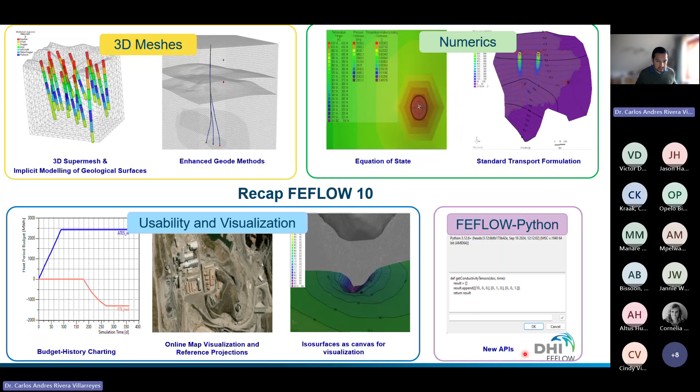And we obviously extend our Python interface with new APIs. So this was released in November 2024. Now we come to the version today, which is FEFLOW 11. FEFLOW 11 was released this January, late January 2026. And it's again a major software release. It has multiple significant changes in the software.

We keep working in our geological model, and this time we have a full implementation of the geological model. Obviously, there's still few things to be done, but it's very robust in this version 11. We have more workflows about meshes. We extend the way how we manipulate our wells through the well manager, how we group them.

Especially, we are also targeting a lot of different features for the geothermal market, and FEFLOW 11 is a version faster than ever. So we have introduced a significant performance boost on the way how we compute the different calculations, and I will elaborate this in the next slides. So if you want to get more details about all these features that I will explain today, everything is explained in our online help. There is always a what's new page where you can see all these different changes.

So let me start with the geomodeling part. So we introduce a new concept, what is called now in FEFLOW 11, a structural model editor. And this is the foundation and the base of all our different workflows today. And it will be the future tool for developing geomodeling workflows in FEFLOW in the next consecutive versions, in FEFLOW 12, 13, and so on.

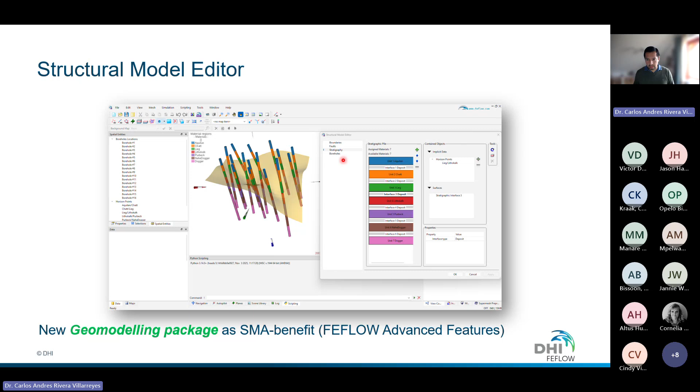A stratigraphic page where you define your stratigraphic pile, the definition of the different materials and the interface between the materials, and the raw information, the boreholes. So what do we support today?

And this implementation is actually, as we are speaking, extended, and we have a lot of developments now in the next months. So by the FEFLOW conference in September, we will reveal most of the expansion of this structural model editor. So as I mentioned before, the structural model editor is defined by these four different pages. But let's look what we can do in terms of geology.

So we have a stratigraphic pile. This pile can be built automatically if you import a number of boreholes where with some rules we detect certain logic of the boreholes. The logic depends on the material. So if you have some, let's say, common definition of materials in your different boreholes, we will identify this, build a pile. The pile consists of units. So I have here 7 units.

I have interfaces. We today support 3 types of interfaces: deposits, erosions, and baselaps. We will implement in the next months, actually it is done, but we didn't have time to incorporate it in the graphical interface. So the mathematical part or the background part is completed. We will have an interface that we call unconformal and conformal. For example, if you would like to simulate diapirs, that type of geometry will be available in the next months.

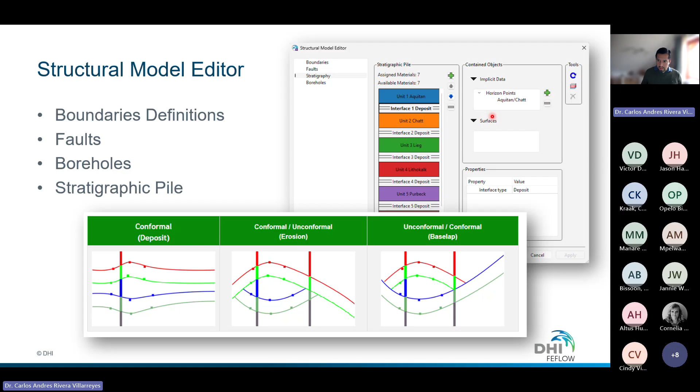Then, obviously, what is quite nice to have in this interface is that you can quickly play around with the type of interfaces. So what's going to happen if I change this interface three as an erosion? So this is a play model, so don't look too much into the details. It's just for demonstration. So I can change easily what the interface is. It's either a deposit or it's erosion, and then it will obviously influence the calculation of the geology.

So you might be wondering at this point, why do I really need to have a geological tool in FEFLOW? And the answer is very simple. Obviously you can do all these things and even more complex things, if we are honest, in different softwares. That's granted. What we guarantee with the FEFLOW built-in workflow is that the geometry that you build with our toolkit is a meshable geometry. So we will build geological interfaces and units which can be meshed later easily in FEFLOW.

That's the whole motivation. Because we have a lot of tools, for example, to import external geological data sets. You can import these data sets, but what we have been learning in the last 5 years is all these data sets come with a lot of data that is not ready to be meshed, because these third-party softwares are very good for the geology, but they have not been designed for numerical calculations in finite elements. So as soon as you start building your complex geometry based on an external data set, we will identify problems. We have tools to repair these problems, but obviously there is a limit to what our tools can repair or correct.

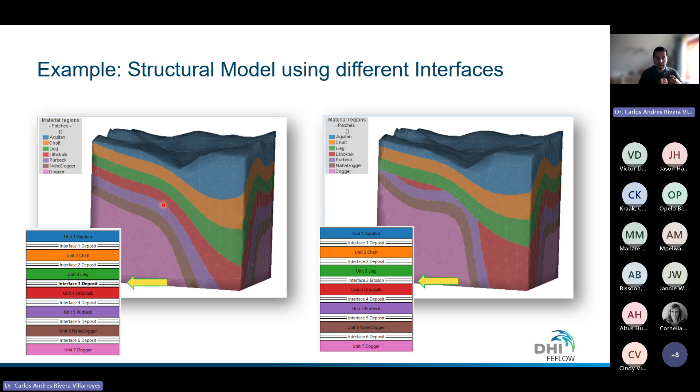Going more in the direction of meshing. So these tools that I was mentioning before are called geometric tools. They are used to correct different types of data. I will explain in a minute how we correct this. And then you have what we call a boundary representation. So it's a supermesh project that is ready to be meshed. You can use the standard mesh generators for the 3D supermesh. Standard means tetrahedral mesh generators.

We introduced a new option now called layer mesh generator. So you can build your layered mesh from the 3D world directly, which is very nice because sometimes you lose the flexibility if you go for a tetrahedral mesh. So here you will have a typical prismatic mesh in FEFLOW, and if you have pinch outs, we can preserve these pinch outs with layer continuity by setting a minimum thickness.

Then the layer configurator has now been modified strongly. This layer configurator has existed in FEFLOW for probably 20 years or more. So now we are introducing new concepts. We have revamped the whole design of the configurator so that it is simpler to build meshes.

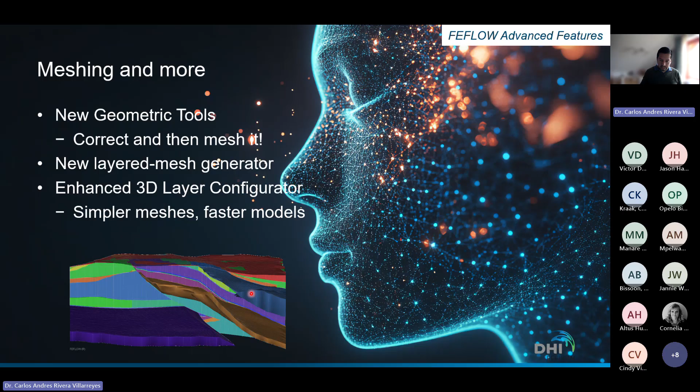So we want to help you simplify models, to create models that are complex, but at the same time the mesh discretization is simple enough, which also has the positive consequence of speeding up the calculation. Let's look at these different geometric tools and layer meshes.

So for the geometric tools, we have a toolbar. It's called Supermesh Preprocessing. In the panel, we have a toolbar called Geometric Tools, and these tools have different purposes. So let me explain. If you see here, I have a fault, which is very finely discretized, and there is a small layer or a box. This is not meshable. If you throw it to the mesh generator, it will give you an error message because this is not fitting.

So we have one tool to compute the geometrical intersection. It will basically intersect every single triangle that you see here with the triangles of the top face and the bottom of the box. We have the intersection computed, then we can remove what we don't need, so everything outside, and we can also retriangulate the surfaces so that the quality of the mesh is nicer. This is an optional step because when we build a tetrahedral mesh, we do this step anyway.

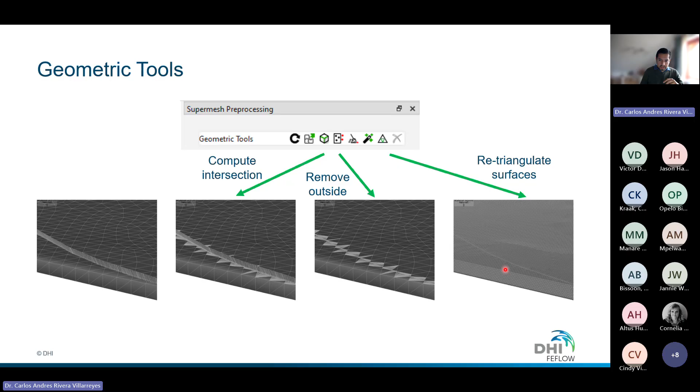So you can use these tools to correct different data sets. These data sets can come from shape files. If you work with shape files, they must be in 3D. CAD data sets, so DXF, DWG, Leapfrog files, so like LFM, and GoCAD files, TS, ML files.

So this layer is basically coinciding with the base of the domain and is disappearing. To continue the layer, we set this value, I would say here in this case 1 meter, and it will have continuity all the way. These configurations do not necessarily need to happen at the bottom or the top of the model. They can happen at any location of the model domain.

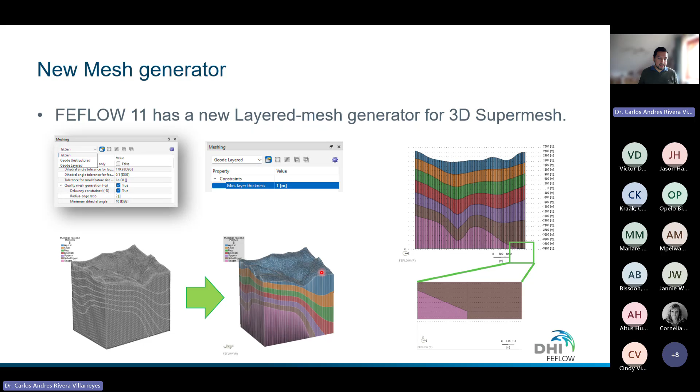So how do we do this? There is obviously an algorithm behind the scenes that needs to check whether we can build these meshes with this approach. We require a 3D super mesh project. We require a valid structural model, the model I was mentioning in the structural model editor, and it requires what we call a no multi-Z configuration.

What is a multi-Z configuration? If you have a vertical plane, obviously you cannot have a FEFLOW slice that goes all the way from the top to the bottom. So in this case, it's not possible to use the generator. What you will need to use is either the Geode Unstructured or the TetGen.

Okay, so you now have a mesh that is potentially made from prismatic elements, or you have an existing FEFLOW model. What can you do now? We have enhanced the way we present all these different workflows in the layer configurator, and now it's called differently. We have a slice layer configurator, and I'm going to explain why we introduced this new terminology. So we now have three alternatives for how to resolve these geological pinch outs.

The existing and very classical approach is what we call the minimum slice separation. Slice separation, because if you have a pinch out of the layer, a layer is defined by two consecutive slices. So we set the height of the slice, and this minimum height basically avoids the pinch out of the layer.

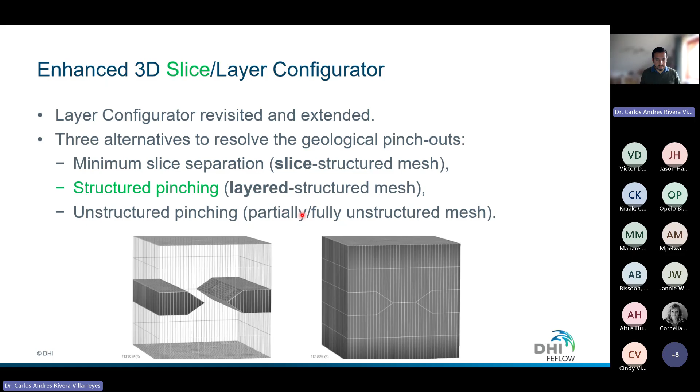And then we have the unstructured pinching, which basically means we will build a tetrahedral mesh if we have cases of intersection or collision between the different slices or surfaces. So this new concept of structured pinching is quite practical, because even though your layer does not extend over the whole horizontal domain, it will be treated as a layer in FEFLOW.

So you can go through the spatial entities. You can look at the layer that you want. In this case, I'm looking at layer 25. There is this one. I will have access to the slice view, so I can look at the top and the bottom of layer 25, even if there is a small area, and assign properties, assign boundary conditions.

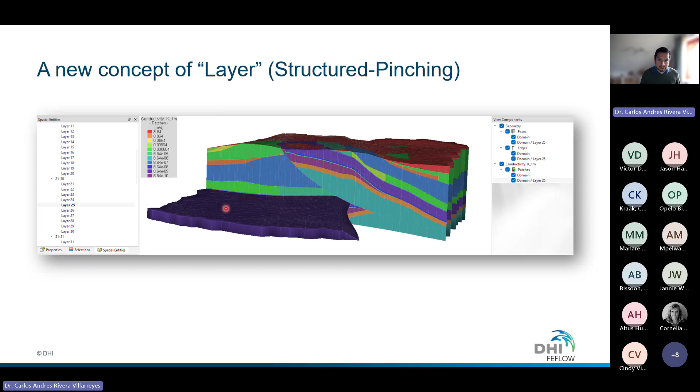We have also activated or enhanced our different selection tools to operate in situations where the layers are discontinuous. So if you have a boundary on the top, you can copy the boundary down. So everything that you normally do with layer-based models, or what we now call slice-structured models, is supported with this new approach.

How does it work? So you have the layer configurator again, the 3D slice layer configurator, to be precise. The workflow on the left side is exactly the same. So you put your slices. Every slice has an elevation, either constant or interpolated by a set of points.

Then we could detect whether there is a violation of the minimum vertical separation requirements. So you can test the value. I know that I build my models with a 0.1 meter minimum thickness. So I can ask it to evaluate this, so I can resolve this. And when I resolve, it comes with three potential options. The enforced minimum slice separation.

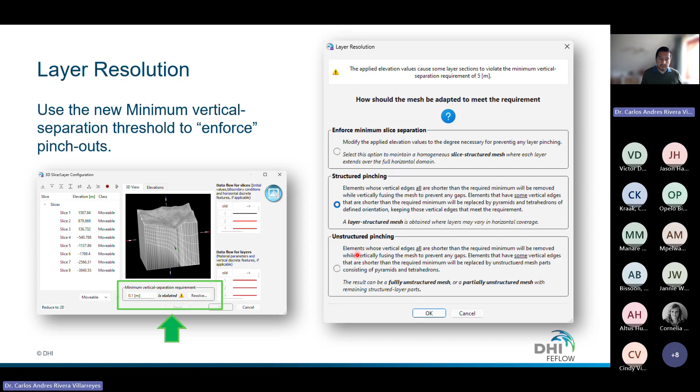This will be standard FEFLOW models where the slices run all the way through the complete lateral extension of the domain. Structured pinching will do a geological pinching in an organized manner by preserving the visualization in the slice views. And unstructured pinching could be a tetrahedral mesh or partially tetrahedral mesh.

So let me try to demonstrate this in examples. I have an existing model. The model is quite large. You see here it has about 4.7 million nodes. It's a significantly large model, so it takes some time to run. I have a lot of complex geologies. So there's a fault here.

And because we were using this preservation of the slices in previous software versions, all my slices need to run all the way from here until the end. So you see I am accumulating a high number of slices here. This is important to know, because these are tiny elements, but still they add up to the matrix. So we are escalating the size of the matrix significantly, which will obviously produce a decrease in performance.

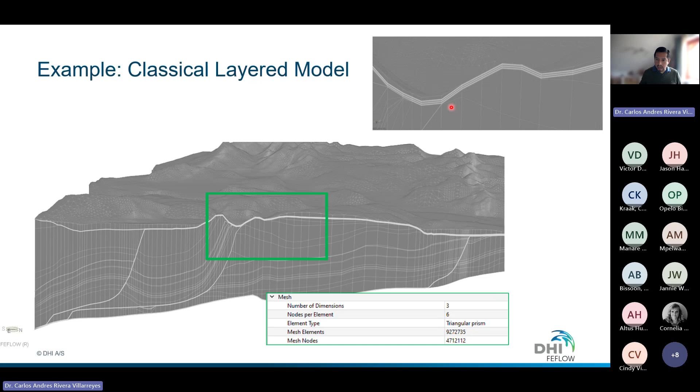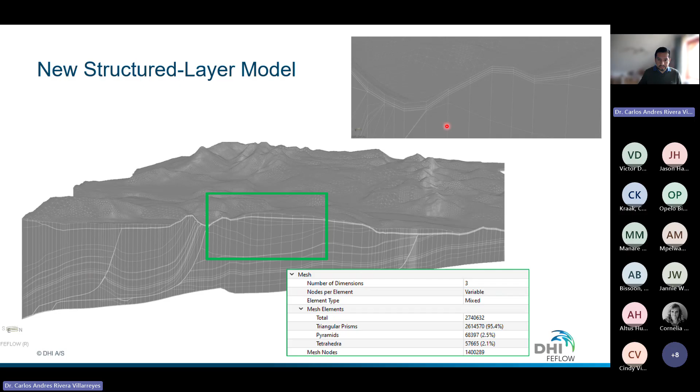So with this new approach, if you look here, I can simplify the number of elements. Simplifying the number of elements, or nodes actually, will simplify the number of equations to solve, and the model per se will run faster. So we can evaluate this in a cross-sectional view. It's probably easier to see. This is the original cross-section with all these tons of different slices.

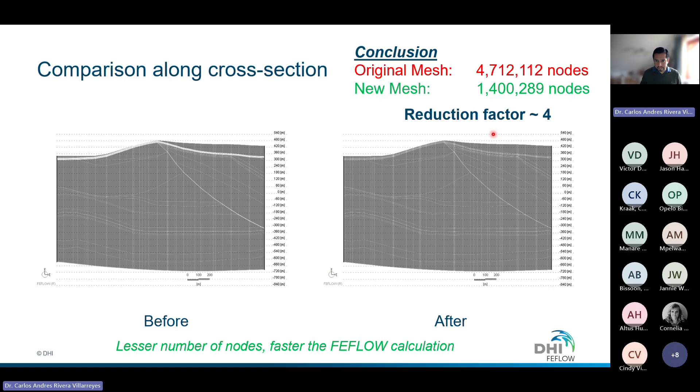So I go from 4.7 million nodes, and the reduction is a factor of 4, to about 1.4. So you can more or less say that your FEFLOW model will run 4 times faster with this new setup. Also nice is that if you have existing models, you can use this approach already.

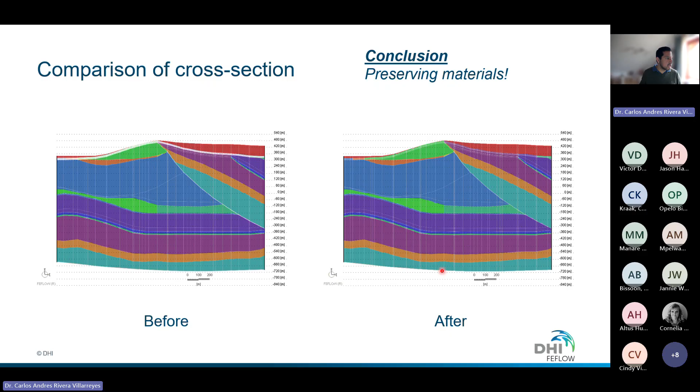So if you have parameterized the model, you have calibrated the model already, you will have all this information here. This is, in my case, the conductivity. I can take this, open the 3D layer configurator, evaluate a certain limit for the pinching, and eliminate all the layers with slices that I do not require. And it will preserve the assignment of the material properties and boundary conditions.

We also have it interactive, which is new and very, very nice. So if, for example, you would like to pinch out this one small here, you can create a selection of elements or nodes and then use the new tool called fuse delete, and it will basically collapse the element heights and eliminate this additional set of nodes.

You can do the opposite if you have already created a layer with the structural pinching, and now you need to add more slices vertically. This was impossible in previous software versions, because we blocked this workflow as soon as you changed the topology. So now you can take a selection of elements and include different layers. It's called the split layer tool.

Changing the topic now, we will be discussing the well manager. The well manager has also been restructured in a more intuitive manner. We disconnected well creation from the existence of the wells. Before, you needed to have wells created, and then you grouped the wells. Now we can have groups that are empty. You can create as many groups as you want. Each of these groups could have one or multiple rules or properties, depending on the case.

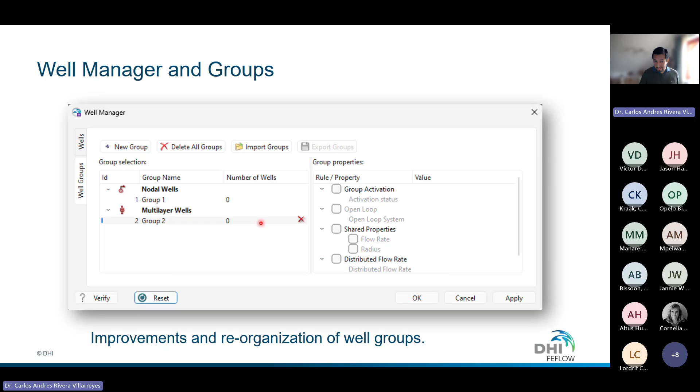The well manager is really powerful; it can help you do a lot of operations with wells. But as soon as you have many wells, it might not be so easy because it's a tabular view. So we introduced a new option in the editor toolbar, which allows you to assign well groups to a different set of wells. The option is available for well BCs, multi-layer wells, and borehole heat exchangers, meaning the 3 types of wells that we support in FEFLOW.

Normally you go to the toolbar and assign, for example, for the well BC 20 liters per second as a pump rate. Instead, you can click on the icon and it will change to the well group assignment. Then you can take any of the existing selection tools in FEFLOW and simply pick the group from the combo box. It could be a group already with wells, or a group which is empty, and then you just assign it.

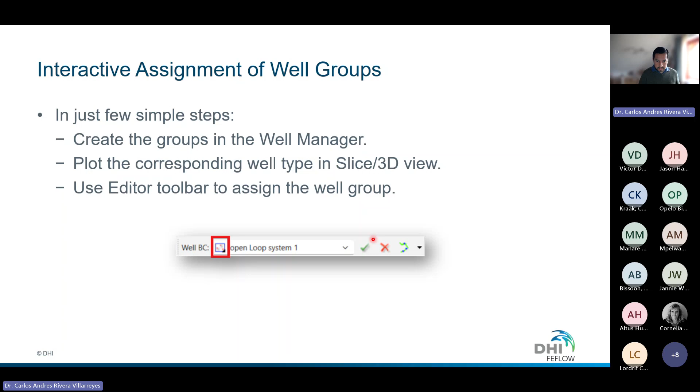This is really nice because you can also display the names of the well groups. So if you have many groups and many wells, you know exactly what you are doing within the different assignments, which is really, really practical.

Geothermal features. Maybe you are not doing much with these geothermal features, but it's probably also interesting to see where we are operating with the software. We introduced a new type, what we call open loops. An open loop is basically a doublet of an injection and a production well, where you pump and then put the water back. The water comes back either at a higher or a colder temperature. You describe this relationship by a delta T or by a power demand.

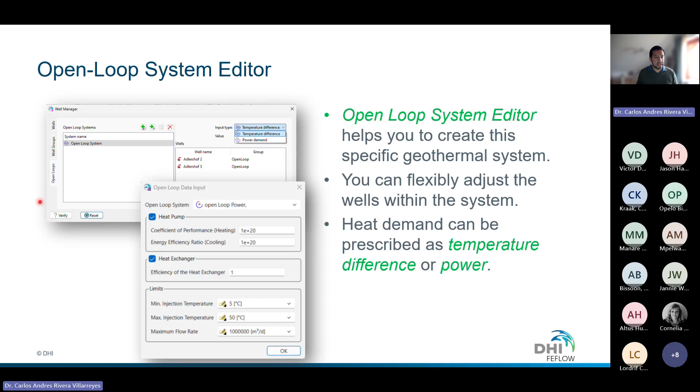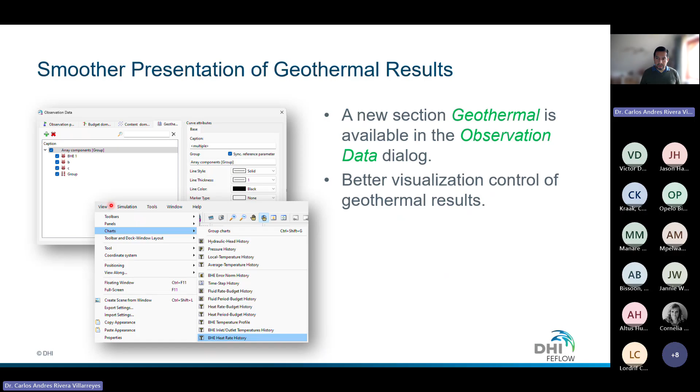We have a special editor dedicated to creating this type of system. It's really nice. We also introduced new types of charts for geothermal applications, so everyone working with geothermal can evaluate their results easily. These are the types of charts that we present for this open loop system. These are totally new charts we didn't have.

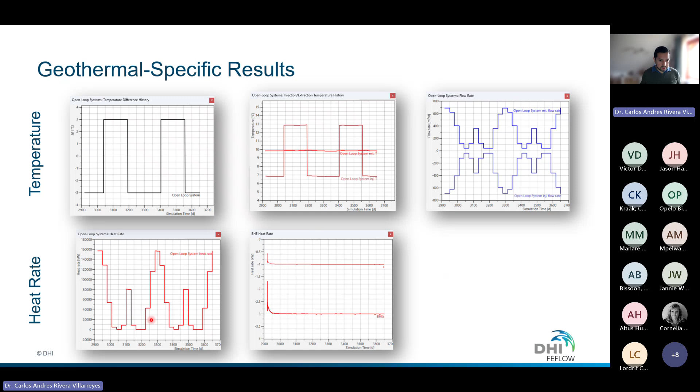We can look at the temperature difference. We can look at the temperature at each of the boreholes. Then the flow rate obviously is interesting to know. And for closed loop systems and open loop systems, we can nicely monitor the heat rate, which is the power, basically important for the designer who would like to know how many kilowatts can be extracted from the reservoir.

Beside this specific improvement, we have general improvements as well. We have enhanced visualization of the cross-section views. Some tool which was asked many times, so we decided to prioritize it, is the possibility to visualize in FEFLOW cross-sectional views observation points and boreholes, or actually multi-layer wells, and any type of boundary condition.

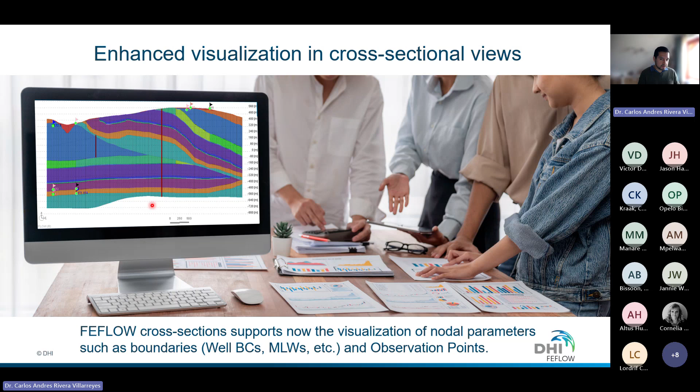So you can plot here your river on top. You can put the different well BCs, boundary condition for the mass transport, the multi-layer wells. How it works, we have a thickness. Every cross-section has a virtual thickness, and if the information is inside or covered by this thickness, we will display it. And the thickness is adjustable, is user defined. You can modify this thickness and then see how much information you would like to plot or not to plot.

Next is we have Python scripting capabilities now redesigned in FEFLOW. So we could have done a lot of things already in Python. From outside is obviously still the case. So you can open your PyCharm, Anaconda, Conda, or Miniconda, or the interpreter that you like. Connect your FEFLOW programming interface with this interpreter and run the FEFLOW library from outside.

From inside FEFLOW, we have some possibilities, but it was very limited. So in this version of the software, FEFLOW 11, we're extending the Python scripting capabilities in the graphical interface. That's the message. So what you can do today is install packages from FEFLOW, provide formatting. We have a default formatting about keywords in Python, for example, the for, the in, the print. Or you decide your own formatting as well.

We have now what we call Python scripting views. This is like another type of view. Today we have 2D supermesh, a slice view, and 3D views. Now we will have a FEFLOW Python scripting view. You can open many of these views, which is very practical because I can have pieces or snippets of my script in the multiple views, and I can execute it independently if I want.

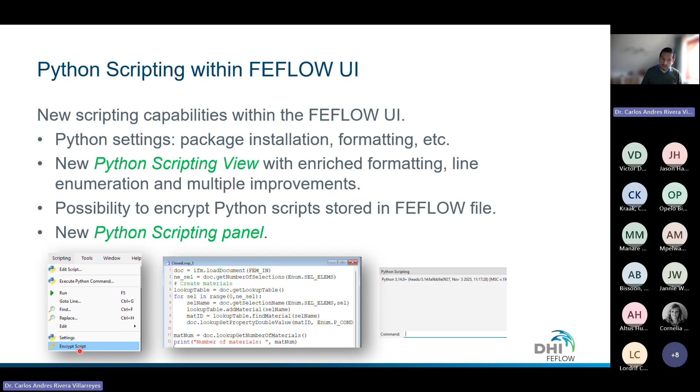And we have a new, what we call Python scripting panel, which is a Python console, which we initialize automatically in the terminal or in the console. You can write your commands, you can bookkeep your commands, etc. So it's really, really practical. And this is the full extension of the scripting menu. We have the edit script, execute Python commands, run, go to line, find, replace, etc. And under settings, you will find the installation of the packages, but also the formatting.

Okay, so we extend also our APIs to support access to different geomodeling tools and also Python extensions. So we have a new package that we call FEFLOW Advanced Feature Python and Geomodeling. So the geomodeling part gives you access to all the structural model that I showed you through the graphical interface. You also have access through the Python interface, for example, for the creation of 3D supermesh.

Now in Python, we provide a new way to interpolate. This was not possible before. So now we use the FEFLOW interpolation routines in Python to set parameters. You can nicely parameterize conductivity or any value of elevation, for example, to build your models. You have access to the geometric tools to repair external 3D datasets, access to the mesh generator, so you can call the layer mesh generator and structure mesh generator, etc., in 2D and 3D. And we also have changed the way we implement the fracture elements in FEFLOW. In Python, these are really straightforward to use now.

FEFLOW computes faster than ever. That is the message that we are going out and sending. We have changed the way how we compute the different things. So the physics is the same, but basically we have rewritten the methods in a more efficient and smarter manner, if I can say it in simple words. So it's expected that through different applications, you will see an increase in the performance. This increase in performance obviously depends from case to case and the type of application or problem class that you have.

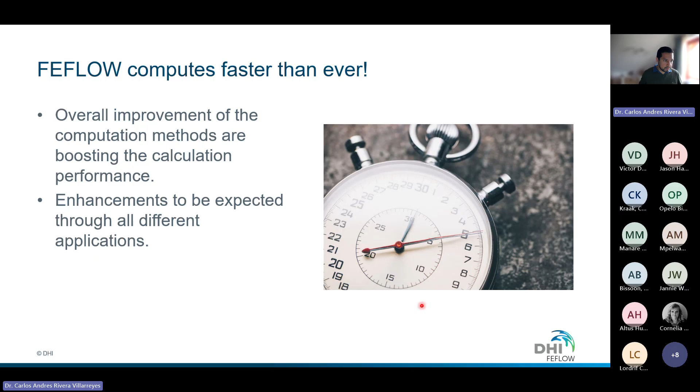To give you some examples, I brought here a few things. This is, for example, a layer-based model with quite large, so 1.2 million elements, and using SAMG.

So in FEFLOW 10, it was 26 minutes. In FEFLOW 11, it's 10 minutes. So it's still a decent speedup factor for a Richards model, and this is a very good one.

The model is still not that large, but especially for models with second and third kind of boundary conditions, there was a significant change in how we assemble the matrix. We basically modified this, and what it used to take 1 hour now is 27 minutes, which is quite good.

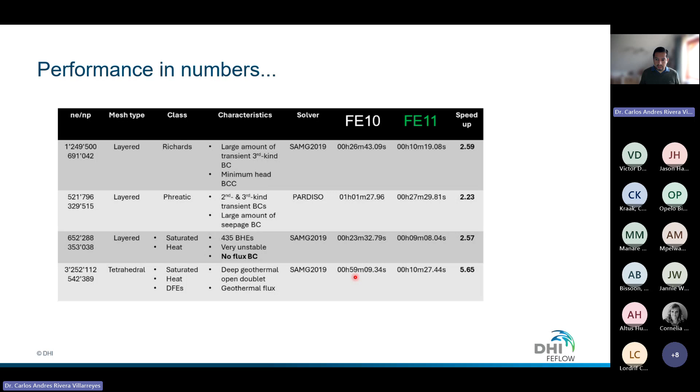And also for a geothermal model, so we have customers working with a lot of borehole heat exchangers. This specific case was 435, which is a lot. It used to take 23 minutes; now we are at 9 minutes; 59 to 10 minutes for this deep geothermal model.

This is one way. So if you start running your models in FEFLOW 11, you should see some performance improvement. Again, it depends a bit on the problem class and the configuration.

There are some configurations that are more strongly impacted, but in general you should see something. The other option for speeding up your calculations is we introduce a new option called iteration control, maximum cycles of boundary condition constraints per time step. So constraints are ways how we manipulate boundary conditions.

We decide whether the boundary is on and off, or whether we need to swap from boundary type 1 to boundary type 2. To do this, if you have a transient model, we need to check in every time step. Internally, we have a number of iterations.

The default is 30, which is quite a lot. We sometimes see that between 5 and 6 could be enough. So you can go here and modify this, minimize it, for example, to 3 or 4.

And then if in the time step it did not agree to a final configuration of the boundaries because the 3 or 4 cycles for the constraints were not enough, FEFLOW will move forward to the next time step, but it will keep the configuration that was found in the last iteration, let's say iteration 4 of the previous time step. So this is something you need to test, and it depends a lot on your configuration.

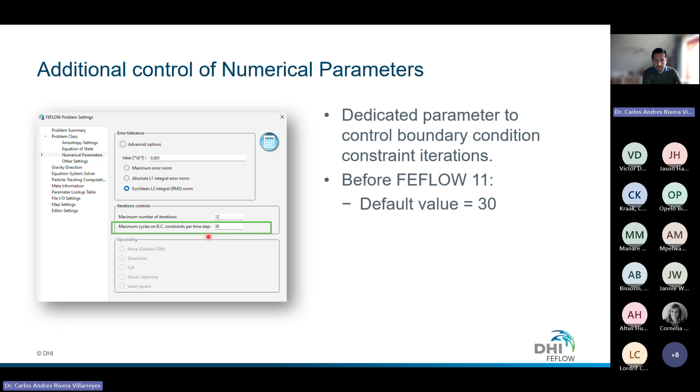Licensing, so I just have one slide. I think Jason would like to talk a bit more about licensing, but mainly from the FEFLOW part.

So what do we have? As you have been hearing, we have a new license manager. It's called the DHI License Manager 2026. This is the first license management that is not developed entirely by DHI.

So we use a third-party software called Revenera, and this is a very famous licensing tool used in many large applications—if you are working with software like Autodesk, Bentley, etc. These companies are also using the same backbone technology.

So we use this license tool to basically bring you more security and hopefully easy workflows, especially if you work with different DHI software products. You can do all this directly from outside FEFLOW.

If you have installed FEFLOW 11, we have a mini tool called FEFLOW License Overview where you can import your file and then you are ready to start running your simulations. It gives you a nice overview of your licenses, including for the advanced features.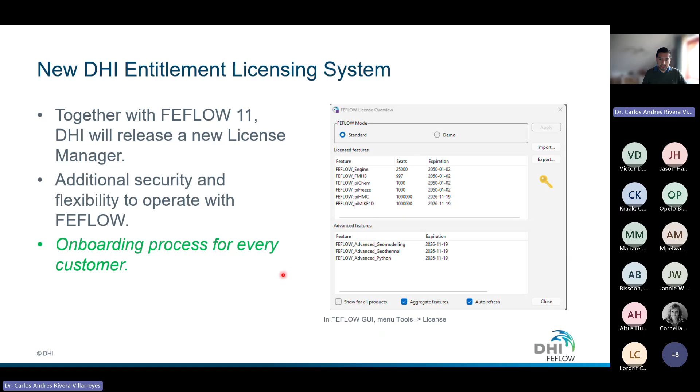We have been onboarding the different groups of customers step by step, so you might have already received an email about this onboarding process, which will explain things. If you have any questions, DHI customer care is looking forward to helping you with that.

I started my presentation telling you we have a number of features which are dedicated to certain modules, and this is the concept of the FEFLOW advanced feature. It's not something new; we started with this concept already, if I remember correctly, 2 or 3 years ago.

So we are expanding this concept with three different modules: geomodeling, geothermal, and Python. If you have a geothermal subscription, or a FEFLOW FMH3 professional with maintenance, you get these additional tools for geothermal FEFLOW Advanced. Geomodeling and Python are special capabilities offered for mining subscriptions, groundwater subscriptions, and those using the Flow subscription, the low entry level for accessing FEFLOW, don't get these features.

We have recently introduced a new subscription type called Flow Advance, which is a FEFLOW F3 license. F3 will give you access to the full capabilities for flow in 2D and 3D. On top of that, you get access to FEFLOW Advanced, the geomodeling part, meaning all the geomodeling tools for building your own geological model in FEFLOW or using third-party geological software, and the advanced methods we develop in Python, meaning the regionalization methods and access to the geomodeling tools via Python.

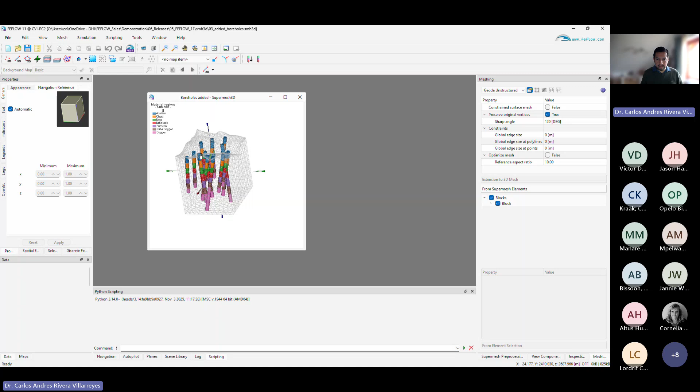And we will start with the geomodeling package. So this is my super mesh. In the super mesh, I will put back the faces. I only have a cube, so I have only the outer faces and nothing inside, except we have the boreholes. They have some logic - the boreholes can be imported or built inside FEFLOW.

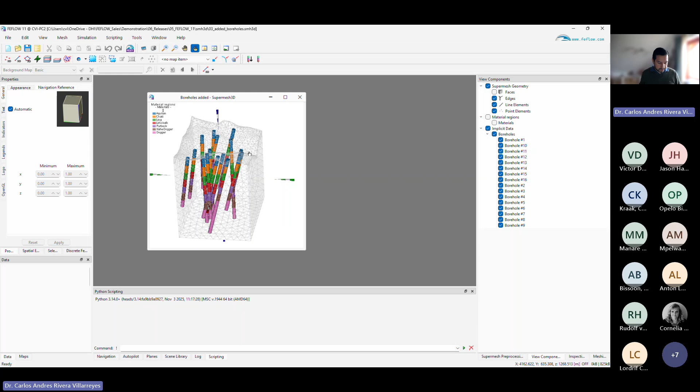So I'm going to open the structural model editor - you can open it from here, structural model editor, or you can press F8. And we have the editor here. The editor is empty except for the part of the boundary, so I saved some time and have defined this boundary.

So the boundaries are basically a list of different surfaces. I have my box, and my box has been split into top, base, and side. In the side, for example, I have different pieces. This is a requirement - you need to define the boundaries because we need to know what is the extension that you would like to model. I don't have a fault here, but if I had one, I could click on the plus and create a new fault definition.

You create and choose the surface which defines the faults - let me remove this one. When you have the faults imported, if that's the case, we have a tool which builds these different fault blocks. Fault blocks are parts of the domain - so we have the cube, and the cube can be, if you have a fault in the middle, cut maybe in two pieces. So we will have two blocks, because our calculation of the geological model will take each block and then run the geology inside of the block.

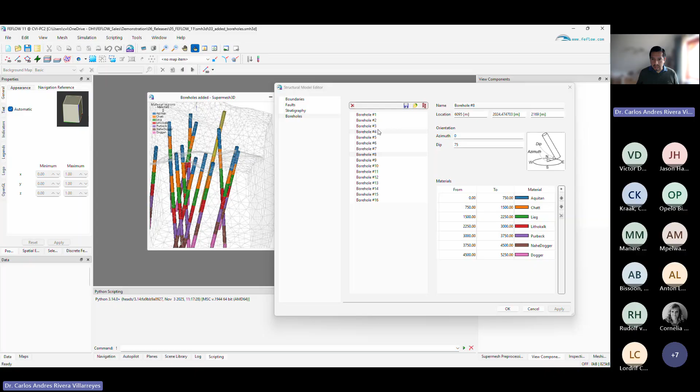Stratigraphy - no, I don't have changes, there is nothing, so I'm going to demonstrate how to create this. And boreholes - we have all the different boreholes. The boreholes are selected as soon as you click. So you can import boreholes - it requires a text file, or we have our own file format, which is also ASCII based. You can easily create these files - it's basically a list of coordinates and material, nothing really fancy.

Okay, so the first step is I would like to extract the points between consecutive units - these are called horizon points. And it will tell me, okay, the stratigraphy is empty - should I create an initial stratigraphy? I will say okay, or yes. And the stratigraphy is built based on the materials.

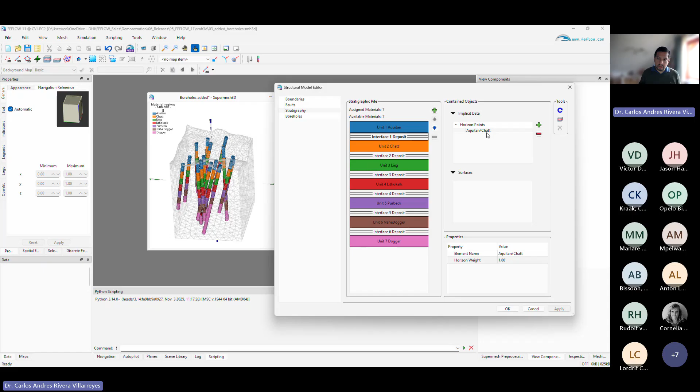So we have a block of material - these materials are still empty, so there are no blocks because we didn't calculate anything. One unit could be one block, or one unit could be different blocks - if we have faults, the unit will be cut in pieces. The interface is created by a set of points, and I have automatically extracted the points from the boreholes. Additionally, I can click on the plus and load another file, or select another list of points and add it as additional constraints for the geological modeling.

These points have a weight, which means I can impose which part of my data has more relevance at the moment of building the geology. The idea is we're preparing all these tools today so that in the next months we can release a full uncertainty propagated on the geological model.

You can imagine a data set where you have few points, maybe a borehole drilled 30 years ago that wasn't well documented, so you can put a low weight. For new information, or locations where you have more data, you can increase the weight. This way you can manipulate and force how we build the geological model.

Another parameter is the average thickness. This parameter is computed automatically based on the geology. You can also enforce it—if I know my Chatt layer here is approximately 500 meters because my geological interpretation tells me this, I can provide this input as a constraint.

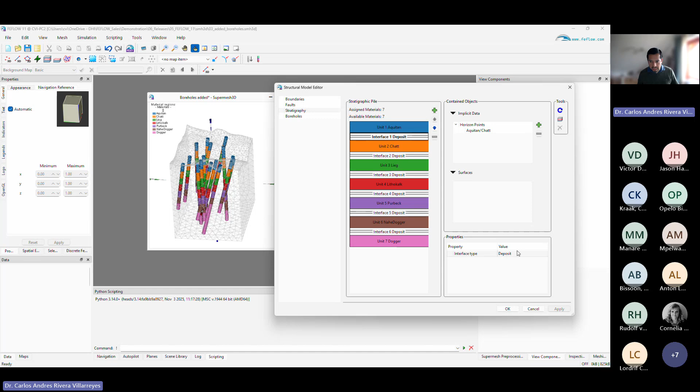These interfaces have points, as I mentioned, and they also have a type, which you can change here. When you are ready, you can press generate implicit surfaces.

It's called implicit surfaces because behind the scenes we use implicit modeling of geological surfaces—we're not doing interpolation like other software. We are computing the surfaces passing through all the different points, respecting all the constraints. Constraints are the faults—if you have a fault somewhere in the middle, it will perturb the ISO surfaces we're building. Different types of interfaces will also perturb this calculation.

So for this model, it will probably take about a minute. It's relatively quick, and this is something we're improving in every version—we like to boost the performance of this technology in the next release.

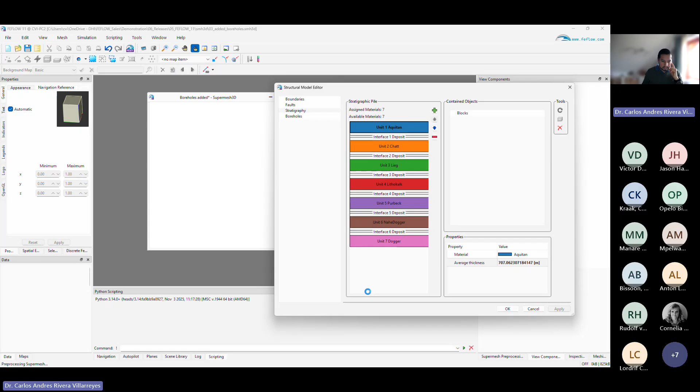So this is what we call a structural model editor. Today, through Python, you can access a lot of information. We are setting up methods for accessing this stratigraphic pile. This isn't ready yet, but it's something we'll publish in the next update, coming beginning of June, if I remember correctly.

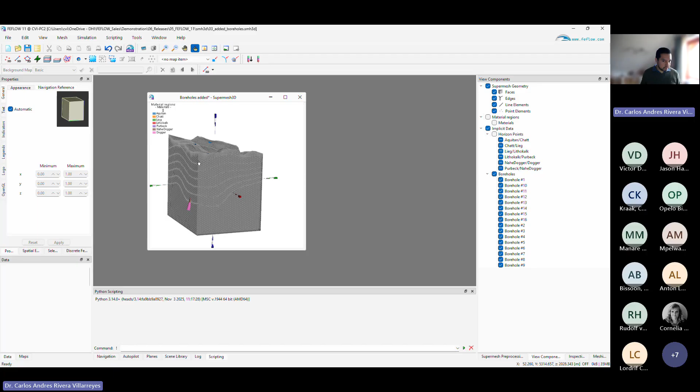So now we have it. I can leave this, and if I go here, I have built a geology in the super mesh. This is a super mesh—we only have the surfaces, we do not have yet the volumes inside.

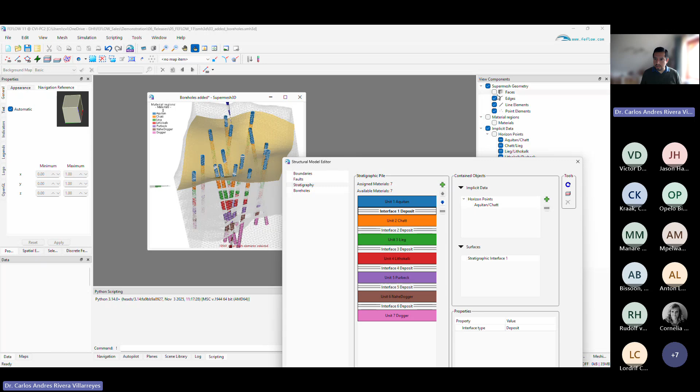So I can go back and inspect. This unit consists of a block—I have a block here. The tool has been designed so you can interact with the different parts of FEFLOW. I can look at the interface—this is the interface here. Let me deactivate the edges so I can see the clean interface. You can check whether the interface passes or not through the contact points. Then we have the next block, and so on.

So you can use all these different options to review your structural model. This information is now available in the meshing panel in terms of blocks, so it's ready to be meshed. Inside the blocks you have the different surfaces, for example containing parts of the box—box 0 was the top, but interface 1 is the contact between the two different units, 1 and 2. So we are now ready to create a finite element mesh.

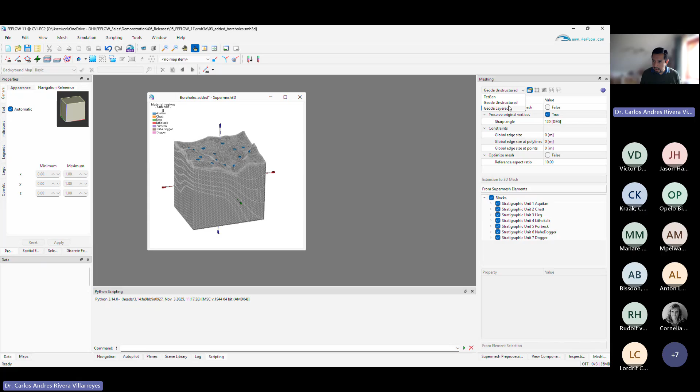If we go to Geode Layered, I will show you one of the mesh generators, the new one for building layer-based models.

It generates, and it's going to use the generator to build a numerical mesh for FEFLOW. So here we have the mesh. We have this slice view. I will close it for a moment. I will also go here, and now we can see that if I plot the material regions, the model comes already with information. So we have built internally this parameter lookup table, where you can connect, for example, your conductivity, so you will easily parameterize your model domain with this tool.

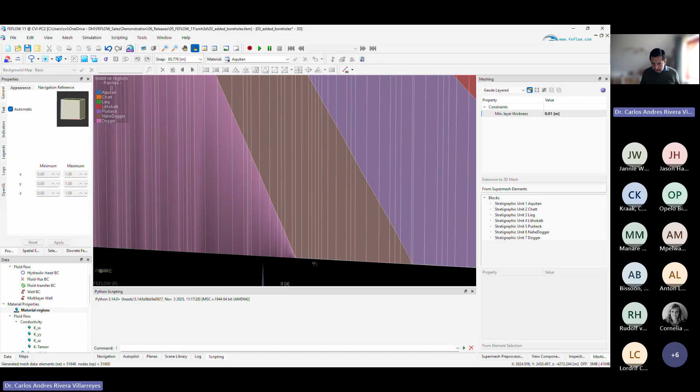There is a pinching here on this layer. It's hard to see, but if I plot the layer thickness, you will see that the minimum layer thickness is 0.01, which is exactly the value that I'm enforcing here. So we respect this layer thickness.

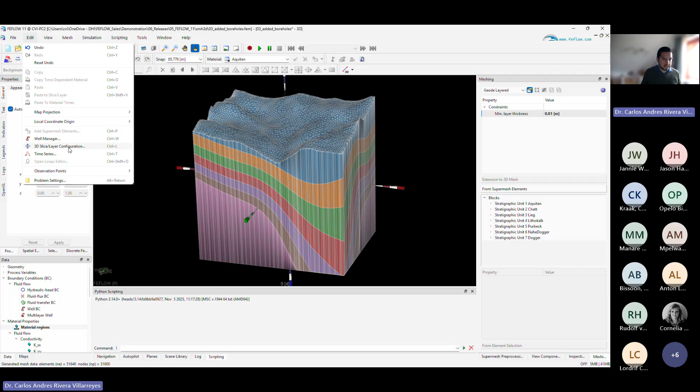Okay, so now let's say I have many of these minimum thicknesses, and as we were discussing during the presentation, this is going to affect the number of elements, number of nodes, and potentially the performance. So let's use the new layer configurator to get rid of this. We can go to the menu Edit, 3D slice, layer configuration, and now we have the tool here. So this is my view. I see that this has been violated. Obviously the value that you require here has to be in agreement with the value that you provide here. So let's say resolve.

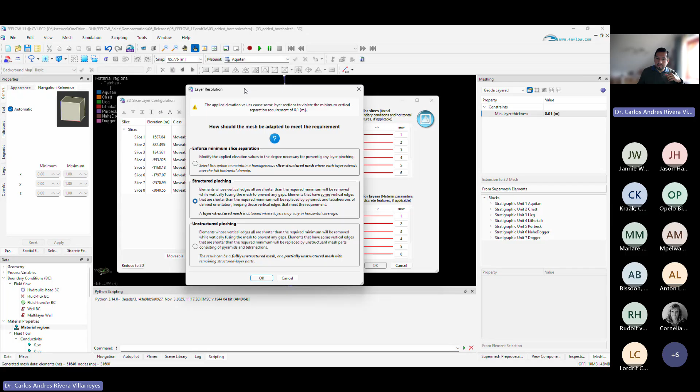It detects there is a pinching or intersection between different slices, and I can decide what to do. The first option is not necessary in this case, because it's the option that I already have. So if the value here is, for example, 0.1 meter and my minimum thickness is 0.01, option 1 will slightly stretch the thickness up to the value that I'm passing here. The second option is the new option, the structured pinching, meaning I will have tetrahedra either in the whole layer or in the intersection where the problem is happening. Let's use the structured pinching.

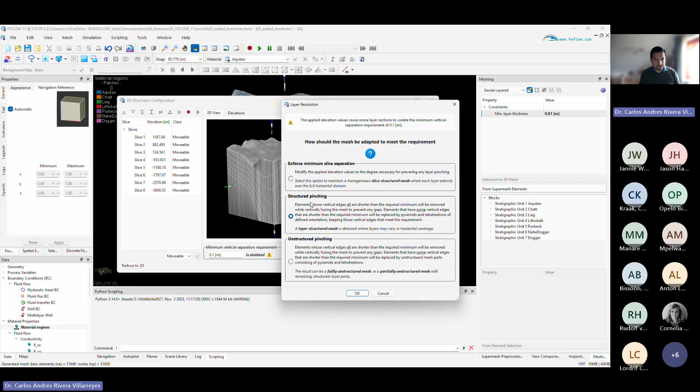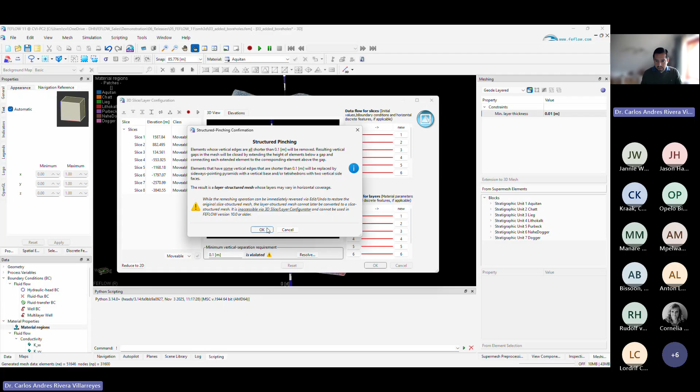Okay, it gives me a message. You need to be careful here. This type of mesh is only supported in FEFLOW 11. So if you are using FEFLOW 10 or older versions, the model will not be loadable. The reason is that these are smart finite elements. The element geometries we are building here are prisms, tetrahedra and pyramids, which we did have in the previous version. But these elements know which element is on top of or below them. We use this topology approach to arrange the elements nicely, so you have the maximum extension of your slice view for navigation and for parametrization later. This is a detail to take into account. And now it's running the tool.

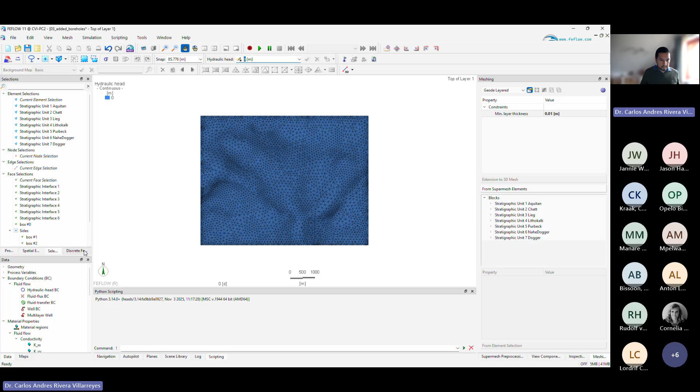Now if I go to the problem settings and show you the problem summary, I can see the element type is a mixed mesh. It's almost everywhere prisms, with 0.1% pyramids and 0.2% tetrahedra. If I go now to the slice view, I'm looking from the top of the different layers, but let's go, for example, to the last one, and I can see that FEFLOW keeps this intersection really clean. So you can reach basically every location of your model domain through this slice view.

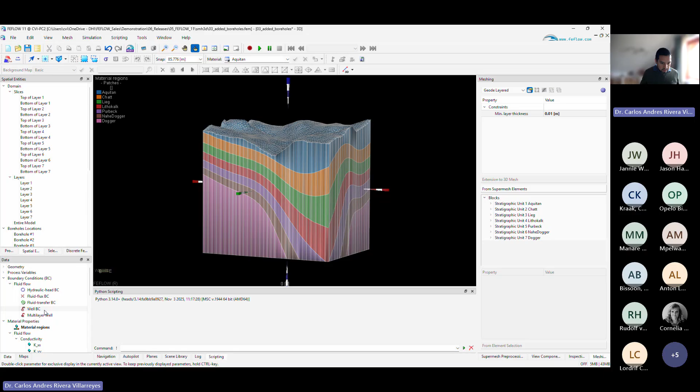Let me go here. If I close this and look again at the layer thickness, I see the layer thickness is not 0.01 anymore, it is 4.25 or 26, because I have eliminated these elements.

Okay, so let's do something more complex. I'm going to open this one here, which is a piece of the model I was showing, with fewer slices to make it simple. Here I already have a cross section created, let me close this one, and in this cross section I visualize the observation points. You can just double click and plot information. That's how it works.

If you would like to change the thickness of the cross section, you have this virtual thickness. It's a property of the cross section. You can modify this factor, and the factor determines whether observation points or multi-layer wells are plotted. It's very simple. Okay, but what I wanted to show you now is to open the layer configurator again, and I'm going to resolve this.

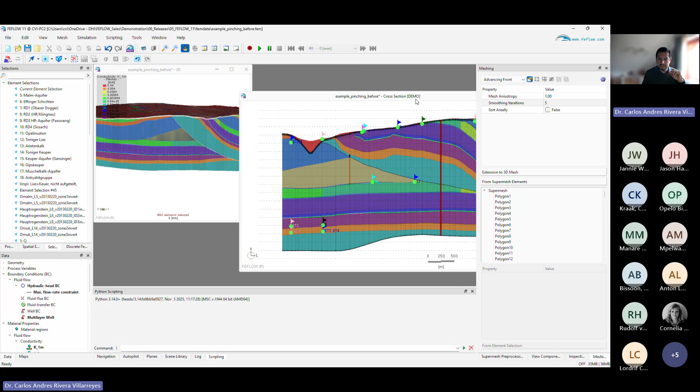Okay, and I have eliminated a number of layers already, not everywhere. I did it on purpose because I want to show you the possibility to split or to pinch out interactively. So we can, for example, go here to the 3D model and take elements, and I would like to create some discretization here. So it's the layer that I'm seeing here on the right side.

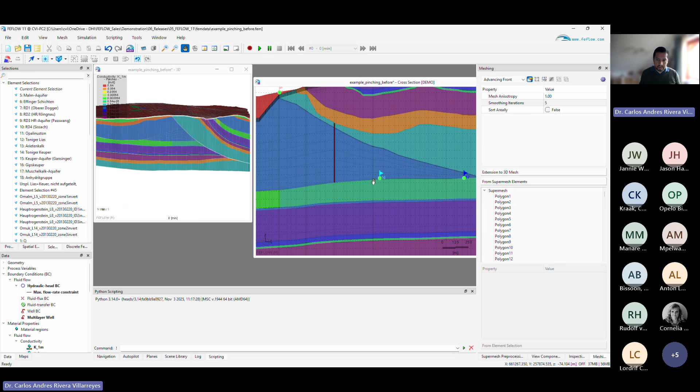And these tools here are called fuse delete elements. So this is the tool to create a pinch out, so we will fuse the elements. And this is the opposite, split layer. So let's add 5 ones. And then it will now clear the selection. It has split the layer, and it preserved the extraction because the extraction comes before from the layer configurator and

the pinching. Now let's say, okay, let me eliminate one. So let's say I would like to pinch out these two. I can take it and then interactively say fuse delete. And you see the layer is gone. So the two slices are gone.

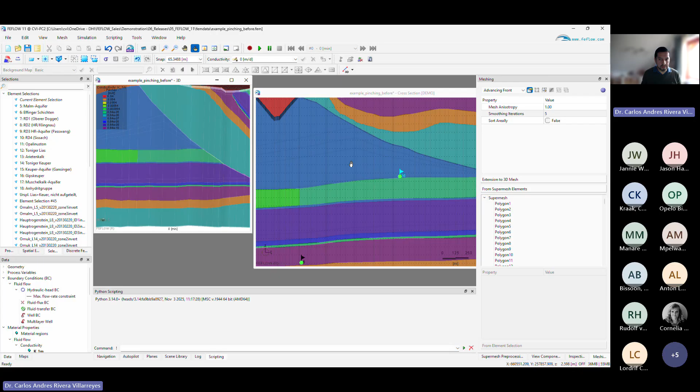So that's the way we also suggest you use the methodology, because there are obviously a number of things that you can do directly from the layer configurator, especially if you know this minimum thickness, so you can globally do it. But sometimes you would like to preserve a few things. Let's say you have a really tiny layer, like a clay lens here somewhere, which is not a pinching, but you would like to preserve. So sometimes you need to do these workflows interactively with the tools, split layer or fuse delete.

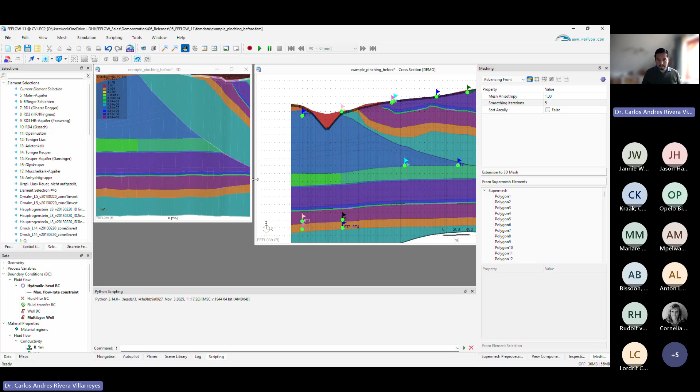And I would like to show you two more things, a bit quick, so that we have time for the discussions.

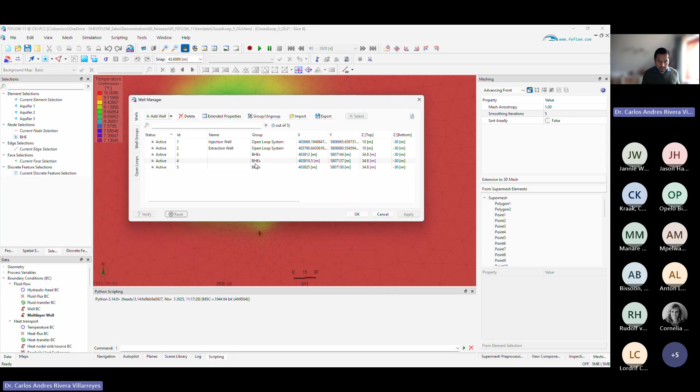So I would like to open the well manager, edit well manager, and here I have two multi-layer wells and three borehole heat exchangers. So let's say create and say test one. This will be a multi-layer well, and I can add it, so we can give a number 1, 2, 3. And I can create another group. Test 2 also has to be the type of the wells that I have, multi-layer well. And maybe I'm doing analysis where these two wells are inactive.

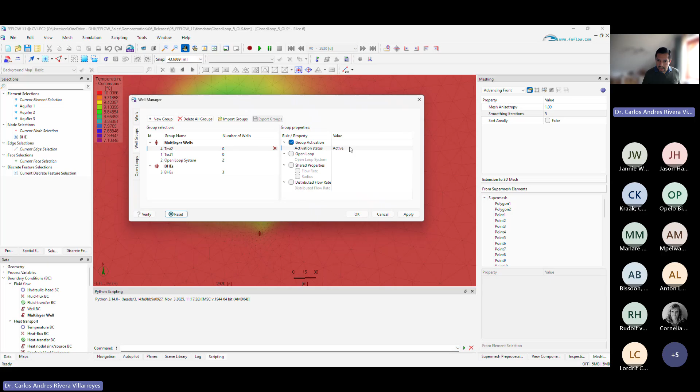Okay, so how do we use the new approach for assigning these groups? You can go to multi-layer wells, because I have multi-layer wells created in the well manager. And I can now, sorry, here, I can change to assignment via groups. So I can just select. I don't need to exactly select the two locations, because FEFLOW will know that I only have wells in these 2 points, and take, let's say, number 1, assign.

And if I go back to the well manager, my test 1 now has 2 wells, and the previous one, which was open loop system, has now 0. I can clearly see from the attributes, if I go to the group name, that these are now test 1. So let me now start creating new wells.

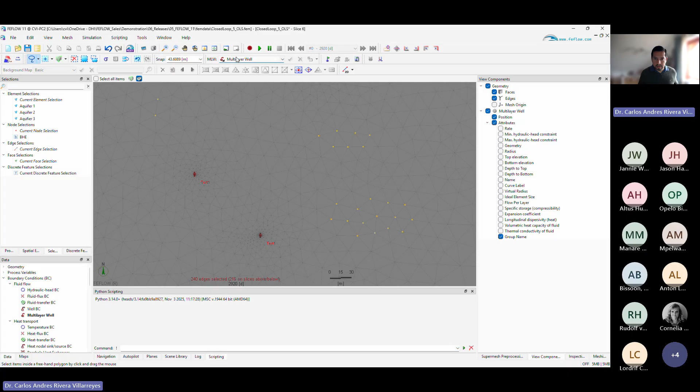So I want to create a few wells here. Sorry, that was not what I wanted to do. It's here, and then here, and here. We can also extend this to all the model domain. I don't need to change the value. I just create the wells here, and let's say I would like to include these ones to group number 1. So it's straightforward.

I can just create a selection and say these are test number 1. I can take these ones and this one to, let's say, test number 2, which is the inactive ones. And they are not showing in the view. We can visualize them if we want, but per default they are not shown.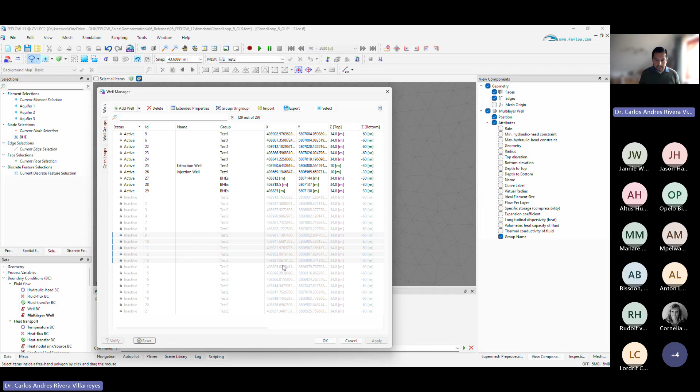And I can still, for example, remove these ones. They are removed from the group, but not removed from the well manager. So if I go to the well manager, I will see my list of inactive wells. So I can either do it from the graphical interface, from the slice view, or I can go here and group them again with another type. So this is really practical, especially for all of you working on projects with a high number of wells.

And in the last part of my demonstration, I will build a FEFLOW model using the Python interface. So I'm going to create an empty super mesh.

So my super mesh here is empty, and I will open a new Python scripting view. So let's put the two in parallel. I have already prepared my script, so I don't need to start typing everything. In this script, what I want to do is create a box. Inside the box, I have 2 wells. So let's put this one.

This is my script, and I can run the script, and I can see immediately the script has created the super mesh elements. You could have done this before from outside FEFLOW. Obviously for this case it's really simple, but imagine you have a complex geometry and you would like to visualize this in a fast manner. You don't want to start creating your visualization tools outside FEFLOW in Python; there are some tools to do that in different Python packages. So here you can take full benefit of the powerful 3D visualization, or 2D visualization in this

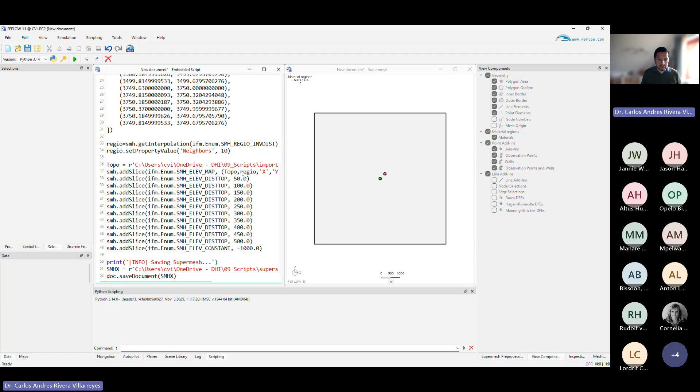case, implemented in FEFLOW. So I have created my super mesh elements, and what I'm gonna do now as one step is add interpolation methods. This interpolation method is inverse distance. I have some data for the topography with X, Y, and I'm adding some slices. And then I would like to save the file. And let's actually create the mesh as well.

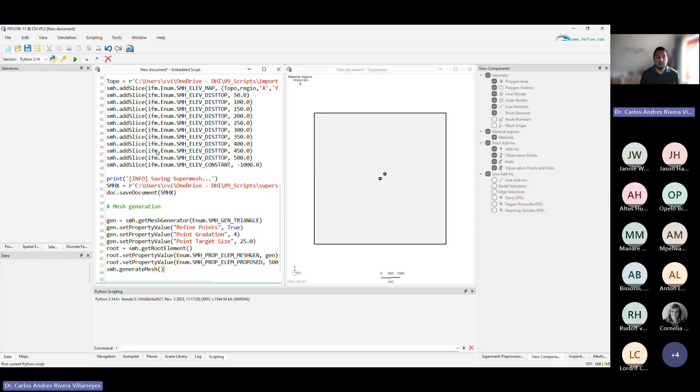So I'm gonna save the file, and after I save it, I'm gonna call the triangle mesh generator with some points, gradation, and a proposed number of elements. I'm gonna build a mesh at the end. If I press start and we wait a couple of seconds, we will see now we have the 3D model built using a single script. So I can do this operation as many times as I want.

So let me create another well. So I can go here. One detail is the information of the slices, which are added here. If I run the script again, it will add another 12 slices. It will duplicate. So it's a good thing to actually remove it in case you are doing this many times. So let's say this one I will modify to 50. The box is 7,000 by 7,000. I will just shift this a little bit. Run again.

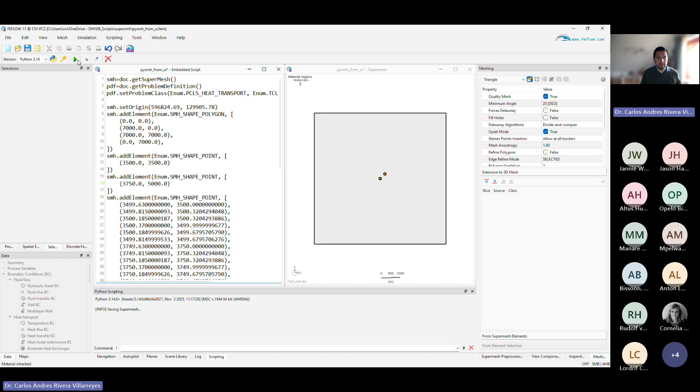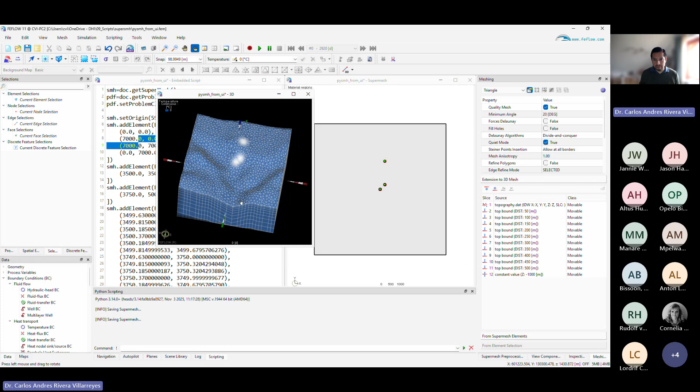What is happening is, you see, I have not modified the point. I have created a new point. Why? Because it's the same logic as the slices. Basically, this method is adding a polygon, adding a point. So if I would like to get rid of the previous point, I will need to remove the element. There is a method to remove, but I didn't do it on purpose. So you can see I have the two wells. Now I have another one here.

And I think with this, I would like to stop here and open the floor for the Q&A session. So let me see if we have some questions already in the chat. Yeah, I can see something here.

Okay. Thanks, Carlos. It was a great demonstration, and it seems that you guys have done a massive amount on that workflow to make things a lot more productive and quicker. So it's really fantastic. Yeah, thanks. Do you want to get started with Rudolph? I think he sent something through first.

So what is the best way to construct the super mesh? The first step in this demonstration, is this done with third-party software or within FEFLOW? If third-party software is used, what is the best to use in your opinion? Okay, thanks for the question, Rudolph. It's a very interesting question.

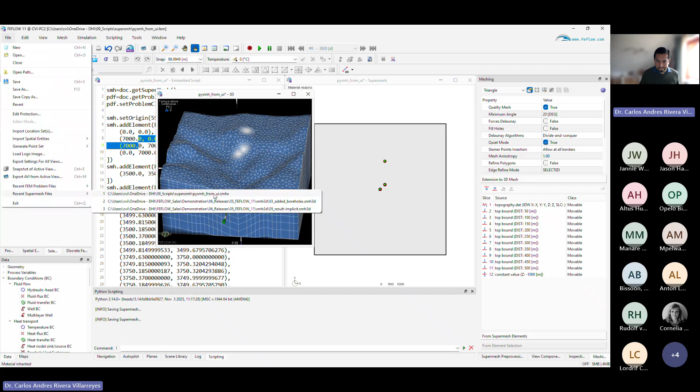Actually, it really depends a lot on the type of geometry and data that you have. So maybe I can explain with a few things here from my example box. Okay, you have a lot of geological software out there, and also a lot of tools that are not necessarily geological products. For example, take a tunnel. I recently got a project where we have underground cavities of a tunnel. This could be LPG, so gas storage. It's really complex. So this will come with CAD. If you are using engineering tools, for civil infrastructure projects, you mainly will work with CAD software to create this geometry.

And from the years that we have been trying and using and also interacting with our customers, the common pattern that we see is the way the data is exported from those softwares and then used in FEFLOW. So, I don't know if I have it here, but a typical mistake that comes is, for you and for me as a hydrogeologist, this is a unit. Geometrically it is basically a collection of surfaces.

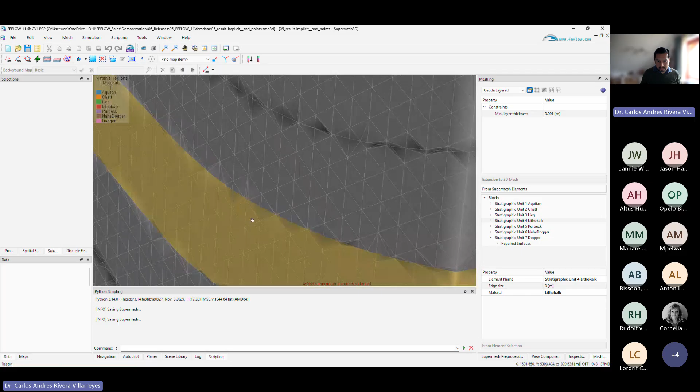If it's not identical, it's worse because then there is no algorithm in the world that is hard enough to differentiate between small changes in elevation. We're talking changes of about 10 to the minus 10 meters in X and Y. So they will treat it as different units or different surfaces that are in contact. And then all these problems start. Because if you have two different surfaces, the mesh generator will say, okay, maybe I need to put some elements inside, although the thickness is meaningless.

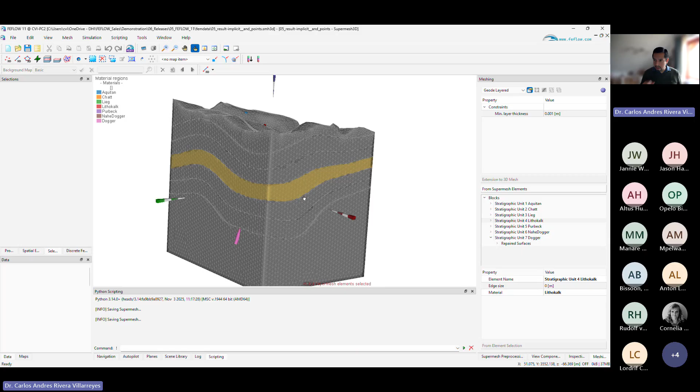So we see with Leapfrog a lot of the problems happening with duplicates. The definition of a surface is not properly done. A surface is not an envelope, and that is where geological software fails. They do a lot of geology, nice and powerful and advanced, but as soon as you export this information and try to plug it into any mesh generator for finite elements, then it's a problem. And that's why we took this road of developing our tools for building geology in FEFLOW.

We recognize we are not there with very complex geologies yet, but we are extending these capabilities in every release. So if you have a geological model, what I would suggest in any case is import it to FEFLOW and try to see if it is meshable. If not, we have geometric tools here to repair data, so we can repair information and correct it. I have been meshing FEFLOW models, for example, using GoCad data sets, really complex, huge models.

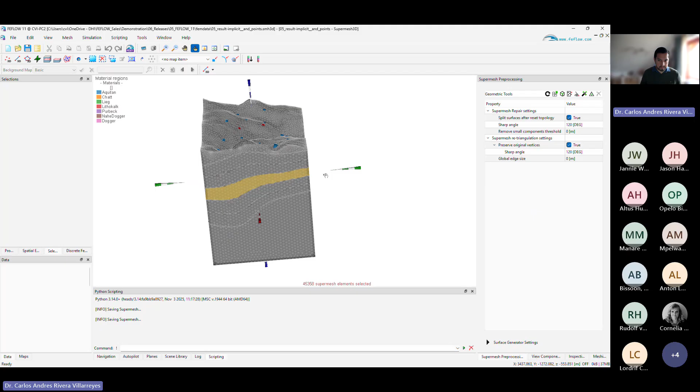Then the geology maybe becomes not that complicated, not that dirty, I would say. It's complicated, but there are not too many overlaps, and we can repair this and you can use it. So I think you need to design depending on the data set that you have. I hope this answered your question, Rudolf.

And then let me take the next one, Anton. Are there plans to add FEFLOW support to a new package to help FEFLOW automation with PEST? Yeah, that's a very good idea, and we didn't really close this door with PyEMU. What we see is this is really dedicated to MODFLOW methods. I have a colleague in Australia who tried to do some workarounds to use PyEMU with FEFLOW, so I can put you in contact and maybe you can exchange some ideas with him.

So we would like to do something in FePEST, and we recognize we haven't done much in the last versions because basically we focused a lot on FEFLOW usability, meshes, and obviously the number of resources is always a topic in every company. But yeah, we are thinking strongly about the next steps for improving FePEST. Thanks, Anton.

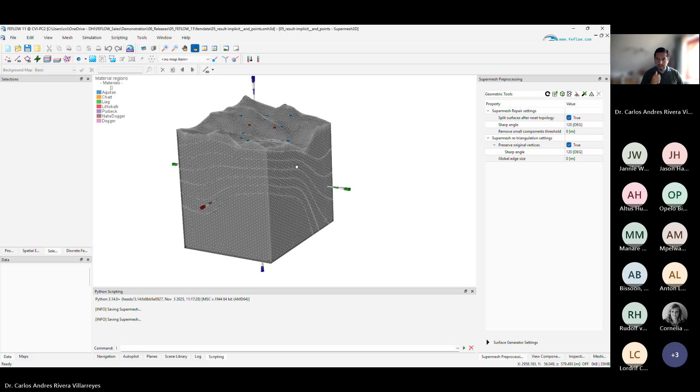Yeah, AI - I go to a lot of conferences, Altus, and the first question I usually get when I talk with customers is when AI is going to come to FEFLOW. There are ideas, and also one initiative in DHI is to integrate AI, and that's part of my vision here for the software.

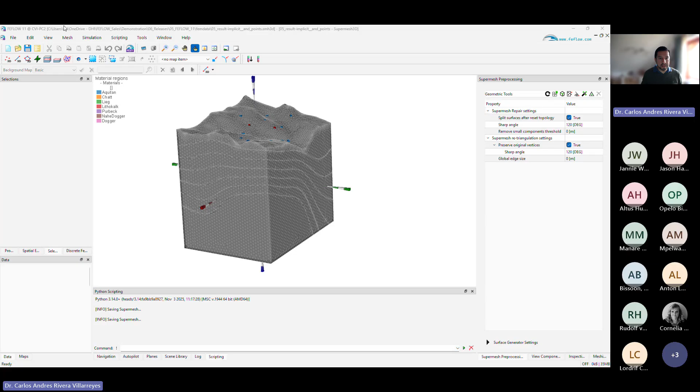I mean, the other example is, if you have an editor here where you type Python, you could basically have a panel where you can say, create for me a Python script that is doing selections in FEFLOW. So I don't think we are that far away from that. It's just a bit of prioritization on what we do, but it's going to come.